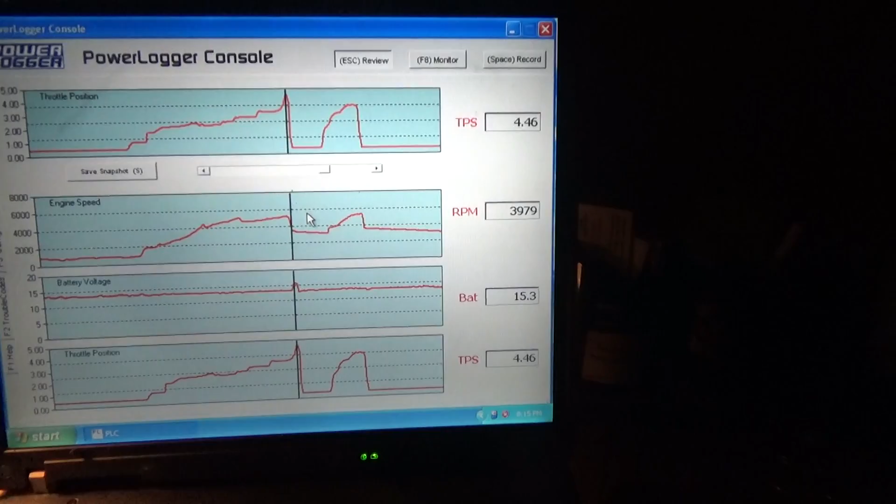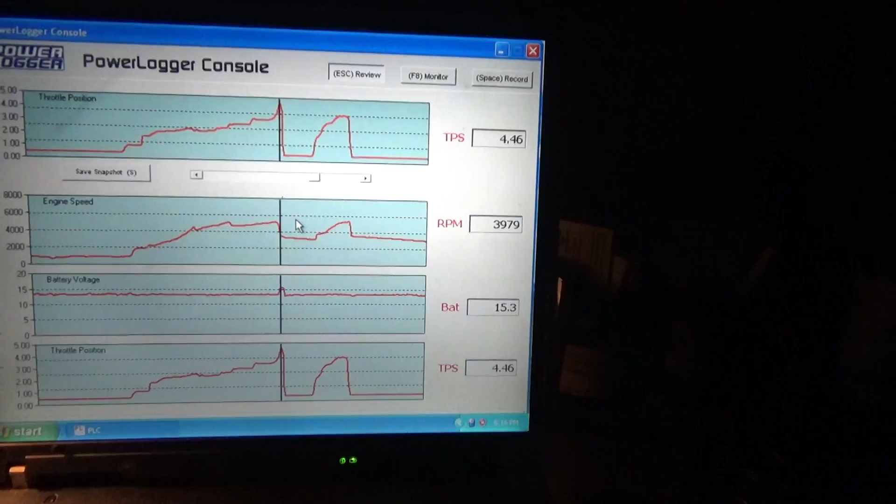Okay guys, I had a viewer contact me, and what their car was doing was as soon as they leaned into the throttle in high gear, the car just nosed over, and when they let the throttle off and then got back into it again, the car picked up and kept on running.

Sometimes this can be the ignition module starting to go. It just can't handle the fire at the higher boost pressures.

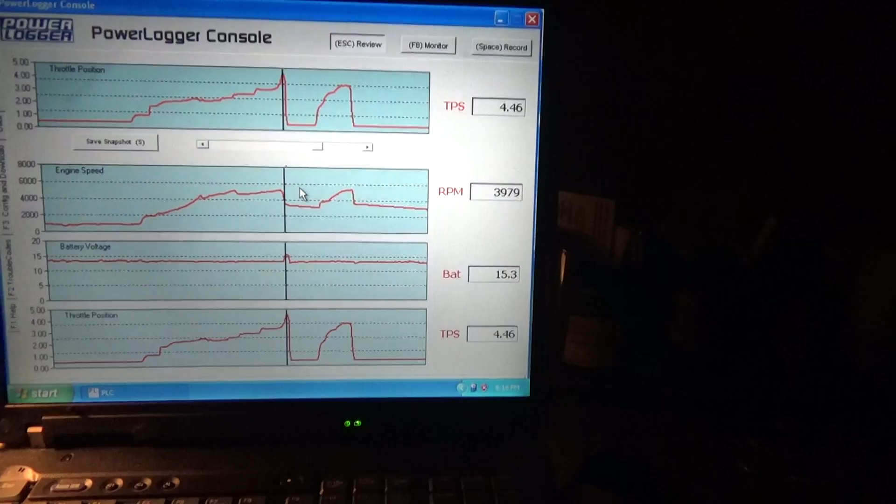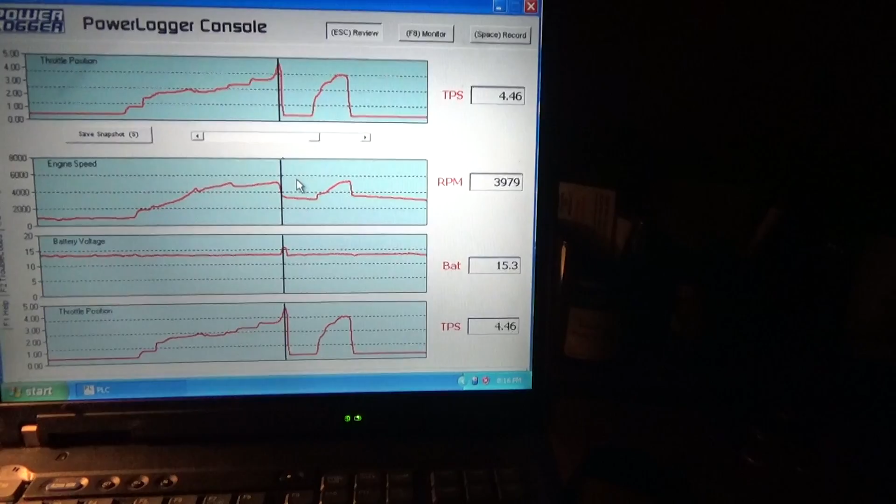This happened to me last summer, and I was at the track practicing this past Friday night, and here's the log from the run. You can see the top one is throttle position, second one down is engine speed, third one down is battery voltage, and the battery voltage jumps up because I have a volt booster on it.

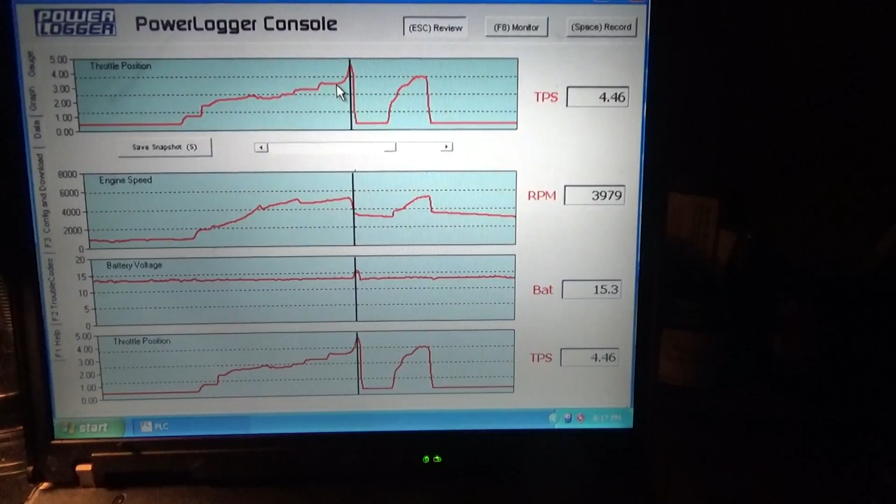As soon as it sees 70% throttle position or higher, it pumps in an extra 2.1 volts. I don't know why, but I've got throttle position on the bottom as well. Doesn't really matter. You can see it, watch the pointer go up. So I'm just easing into it. I was doing a boost pressure check actually, and I wanted to see what would happen at higher boost pressure. Everything was all right. And no, it wasn't.

The ignition module, it's seen better days and it couldn't handle it. You can see the pointer I got here at the top, and I leaned right into it. See me leaning into it, and as soon as I lean into it, the ignition module couldn't handle it.

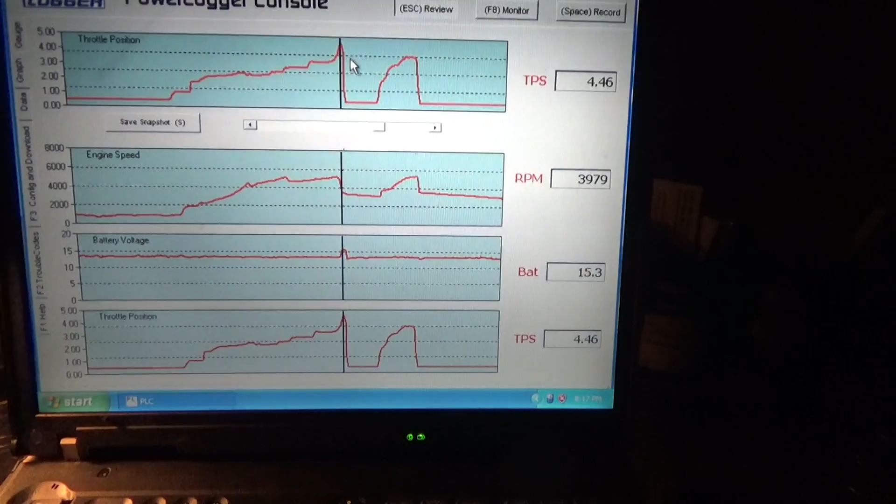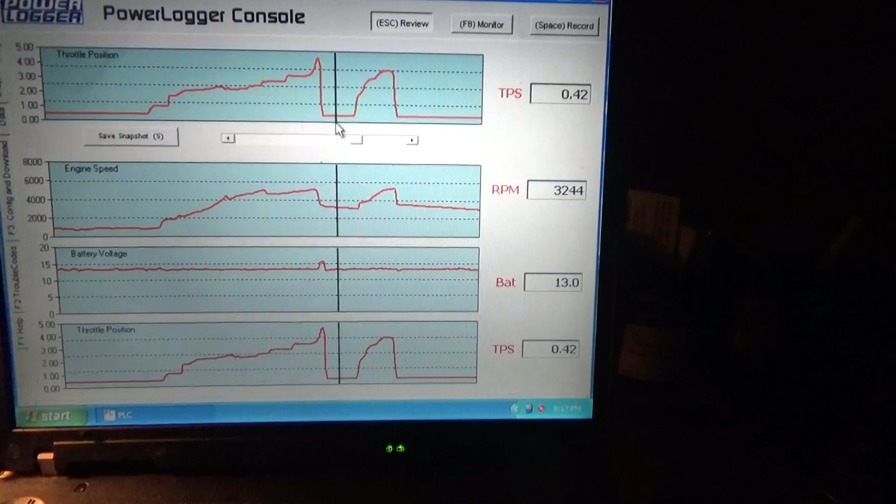And we'll just move this over a bit. You'll see me, the top one here, get out of the throttle. And if we move this down here, eased off the engine speed, so I just coasted along a little bit and started leaning into the throttle again.

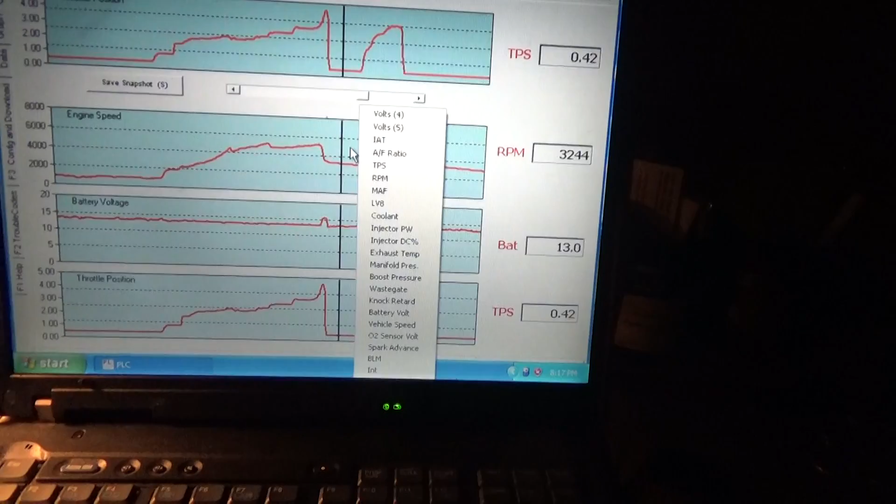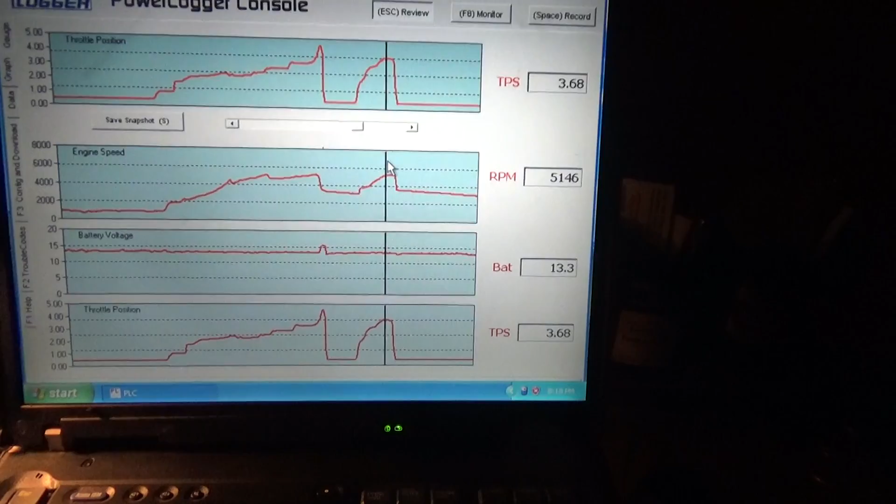And I got back in the throttle again, and I just eased into it. I had an idea what was going on, so I eased into it, and we brought it back up to about 3/4 throttle. And the car sailed along okay, and then I got out of the throttle, and that was it, and pulled over and saved the file and had a look at it.

I went back out, let the car cool for a few minutes, went back out, dropped the boost pressure down 3 pounds, and did the same thing. I eased into it in high gear, and it went through the 8th mile traps no problem at 20 pounds. But it appears as if anything over 20 pounds, the ignition module just can't handle it.

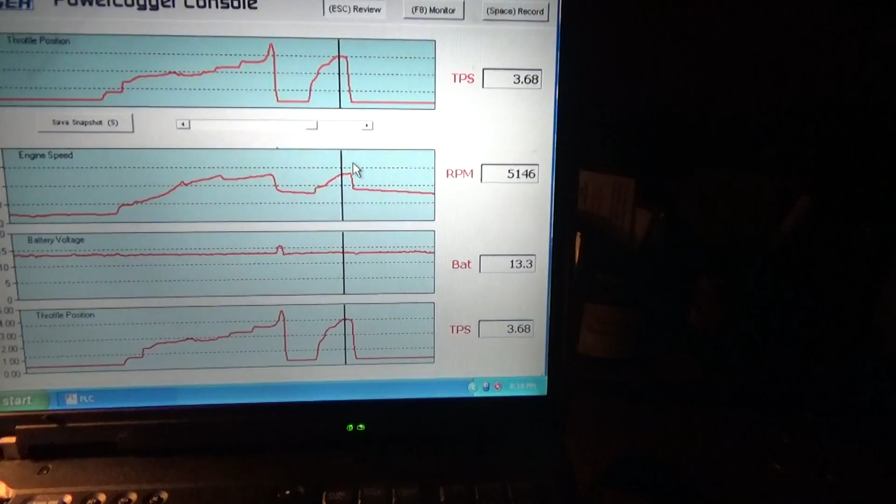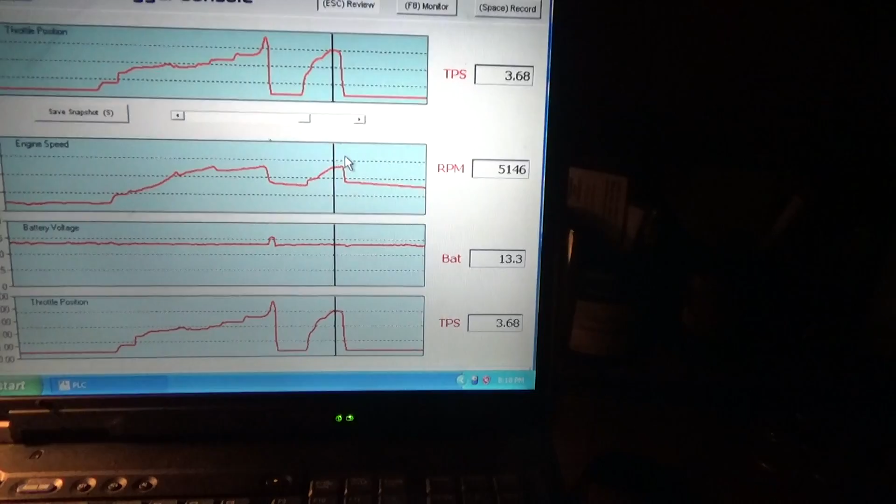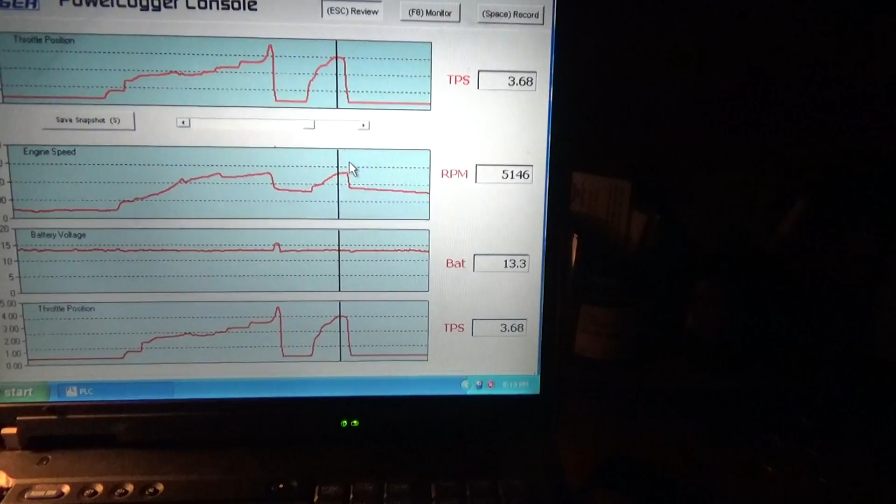We're going to swap it out with another one tomorrow, and we'll get back to the track not this Friday, but the following Friday for another practice session, and we'll try it again. This is a file from Powerlogger, and you can see the ignition module just can't handle it, and it breaks up. Like I said, there's a viewer out there who was asking me about this, and sure enough, it happened to me Friday night for the second time in a year.

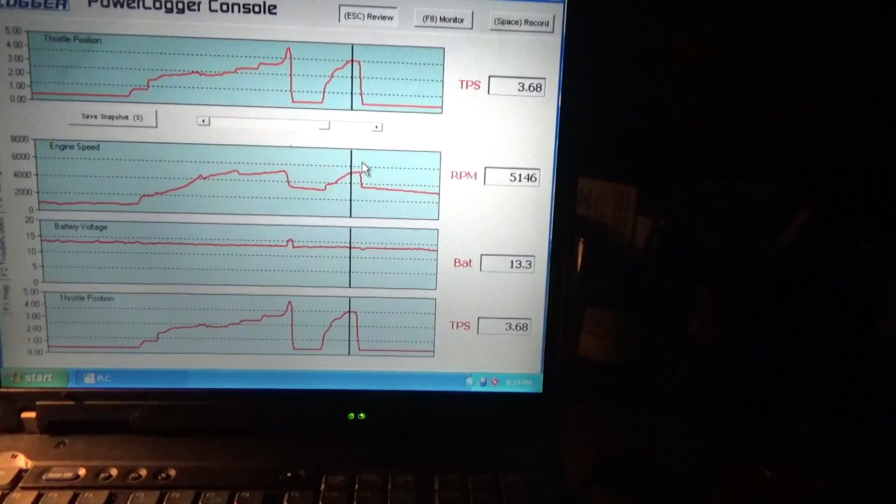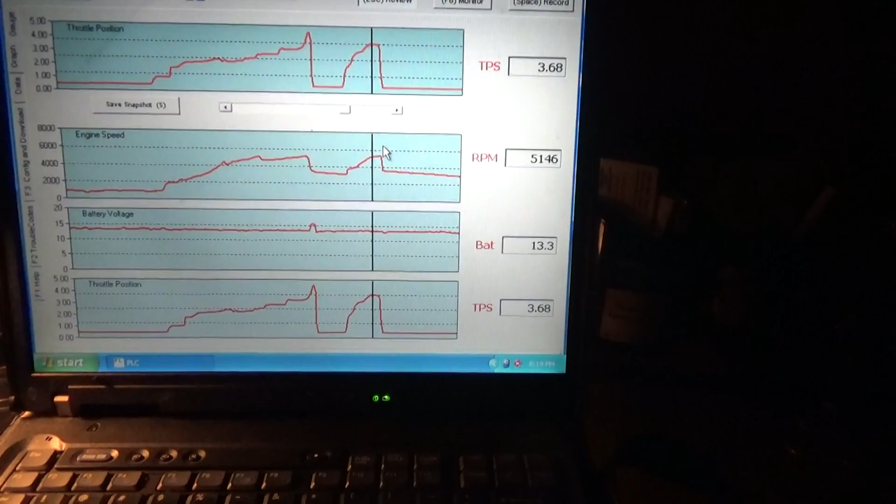Anyway, like I said, we'll get in the car tomorrow, and we'll fire it up with the other ignition module in it, and I'll show you guys how to save a file and have a look at it when the car's running.